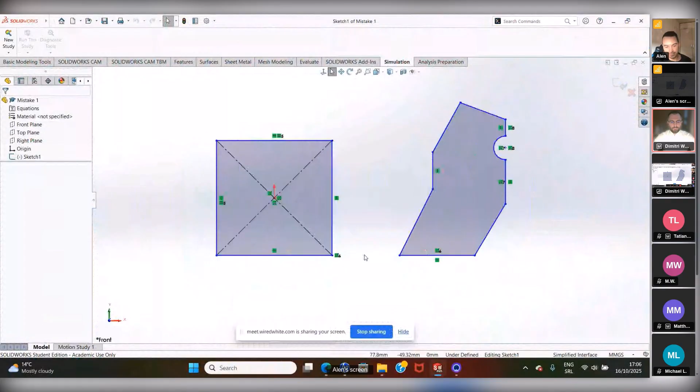So I'm gonna share with you 10 mistakes that beginners make. So this is more for the beginners. I'm gonna also maybe show you a few tricks at the end, if you're intermediate. Maybe it's gonna be interesting to you as well. I'm gonna start with the sketching things, because I think this is very foundational, and I know that a lot of beginners just skip these steps, not paying attention to the sketches, but then later, when they actually create 3D models, they have problems. When they have to redesign something or change some dimensions, then the model starts breaking.

So the first mistake that beginners do is when putting dimensions, they overuse dimensions instead of relations, right? So when you create a sketch, you have to define dimensions. And what a lot of beginners do, they just start putting all the dimensions right here. This is just a simple example. Then they put here, and okay, I already put it here. Let me just delete this. This was from before.

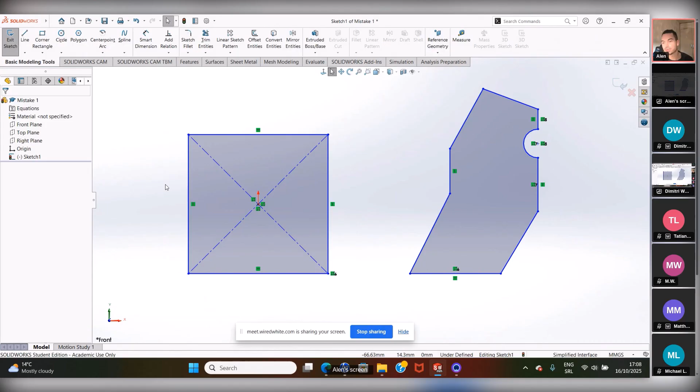Like this one, or for example, they're gonna put an angle here and here, but these two lines are parallel, right? So this is not very efficient. Or they're gonna put the height from this line to this point, but then also from this line to this point, although these 2 points are in the same horizontal line, right? So when you actually want to fully define a sketch, first you want to put relations. For example, if I know that this line here and this line here will be equal, I don't have to put 2 dimensions, right?

I can just click on this line, hold Control, click on this line, and here I have different relations like horizontal, vertical, collinear, parallel, perpendicular, equal, and so on. So I can just choose equal and click OK. And now I have this sign, as you can see, equal, right?

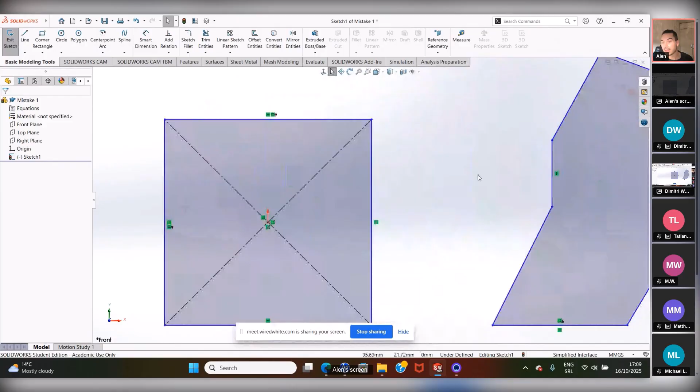Now what I can do, I don't have to put 2 dimensions. I can just put 1 dimension, like this. And now if I change this dimension to 50, automatically the other one will change as well, right? So this is just a very simple.

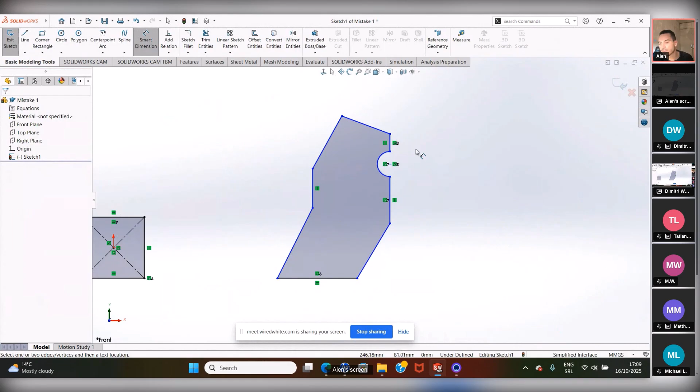Now this is a little bit more, not say complicated, but we have more lines here. As I said, for example, if we have, okay, I got off the sketch.

For example, if I have these 2 lines parallel, first what I want to do is define relations. So I'm going to go here with parallel, like this. And also I have a sign here, this is parallel. Or this point and this point here are on the same horizontal line.

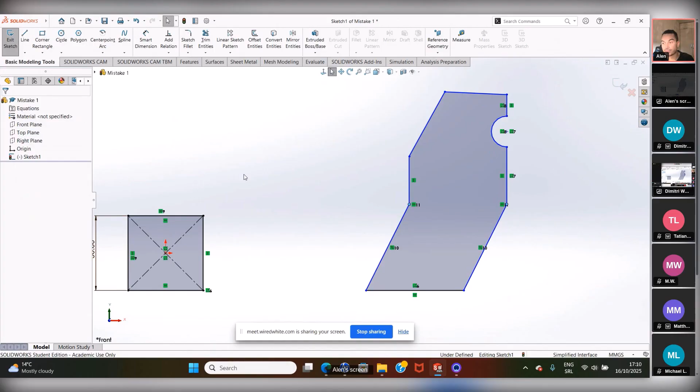So I'm going to click this point, having this point horizontal, right? Or, for example, this one here and this one here, they must be perpendicular, like this. This is just an example. Let me just drag this down, like this. And then, for example, this one here and this one here, they must be equal.

So the first thing I want to do, as you see now, is define all the relations. Because then if I'm going to change something later in the model, these relations will stay the same. This is the whole point, right?

And now I can start with dimensions. Now I can put dimensions on this line. I can put an angle here, like this. And now if I have an angle here, I don't have to define an angle on this one, because if I change the angle here, this one will automatically change since they are both parallel. Or if I define this height as well, I don't have to define this one here. If I define the length of this line, I don't have to define the length of this other line. And now I have fewer dimensions.

So let me just put it here. I have to define this angle. Let me see what I need more. This one here.

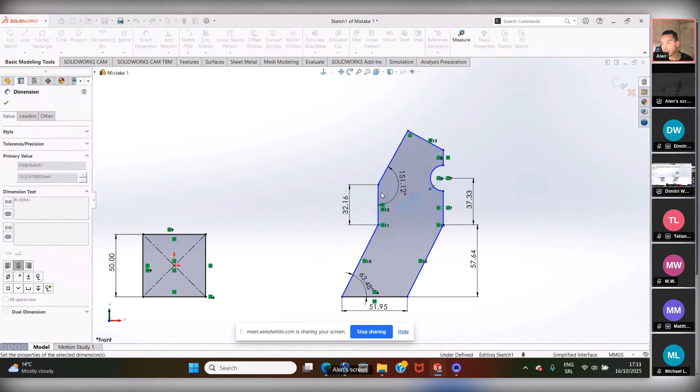A quick question, Alen. Yep. We have Patrick asking regarding the software, whether this is the latest one from SolidWorks or which version particularly are you using? This is 2025. Right, yeah, I think this is the latest one. I think 2026 is still not here. Mm-hmm, yeah.

So basically, once you have these relations, I don't know, maybe I can define even more relations. If I have, let me see if I can do this now. If I didn't put too many, I can also say this is horizontal as well. No, this doesn't work because we have an overdefined sketch now. But that's something you do at the very beginning.

You put all the relations, and now you can put all of the dimensions that you need here, right? So let me see what is actually left here. Maybe this angle, I'm not sure. No, it's not, although this is not needed. This one is also not.

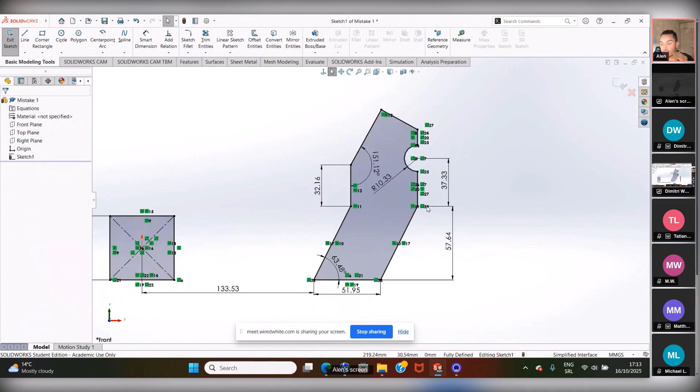It was not the origin, which is another mistake that I'm going to cover. So basically, the lesson here is: first define relations that you have between all sketch entities, and then define dimensions, okay? So that's mistake number 1.

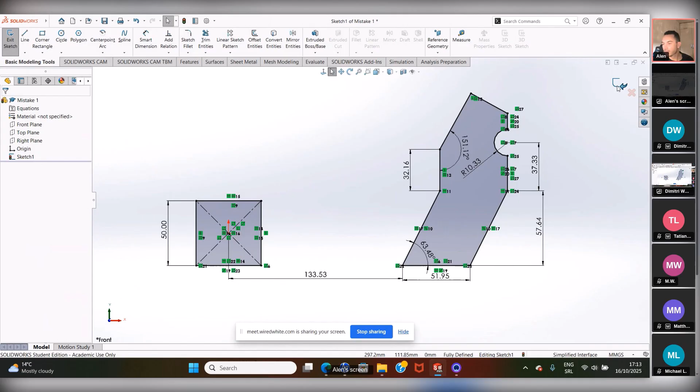I'm going to exit this. Let's go to mistake number 2.

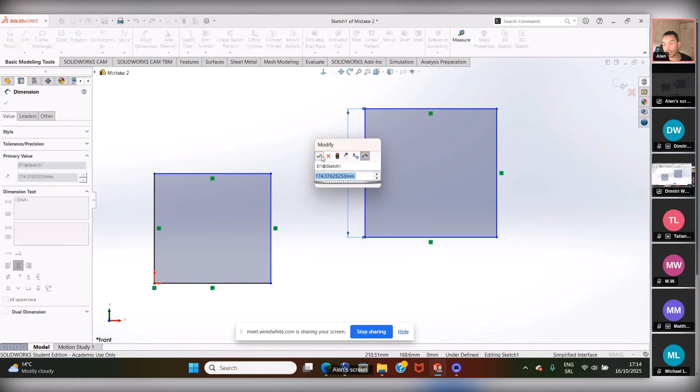This is ignoring the coordinate system, which is actually what I didn't pay attention to when I was showing you. Not only by ignoring the coordinate system, but also knowing where you have to put your coordinate system. Now, as you saw before, if I fully define this sketch, if I put all of the dimensions here, if I try to fully define this sketch, it's still not fully defined, right? Because it's not connected to the coordinate system here. So you want to connect this to the coordinate system one way or another.

The question is where you're going to put your coordinate system. You want to put a coordinate system at a point that's going to be the referent point, so that this point will always be there, and all other sketch entities will change relative to this point. For example, this one right here is in this vertex, the coordinate system, but for this one...

I have to define dimension here. I have to go here, and I have to define this dimension as well. Now this sketch is fully defined. So it's not about only putting a coordinate system, but also making sure you know where to put a coordinate system based on what dimensions will change later.

You want to have a reference point, and that also depends on the manufacturing process—how this part will be manufactured later. So this is designing with intent, compared to designing without intent, where you just put a coordinate system wherever you want. This is also a mistake that a lot of students, beginners, make. They don't pay attention to the coordinate system, so pay attention to it and to where you put it.

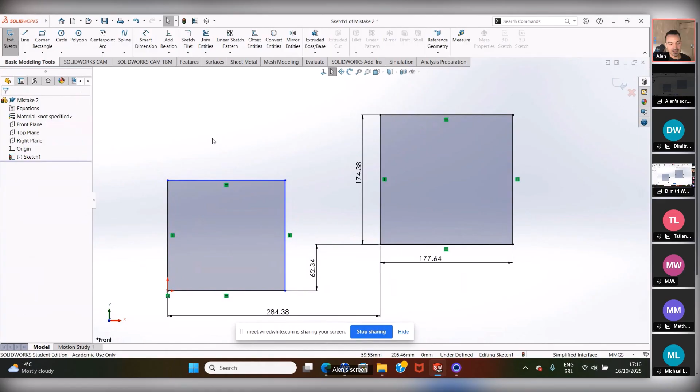So this is mistake number 2. We started with these beginner mistakes. Then we have number 3, which is also related to sketches.

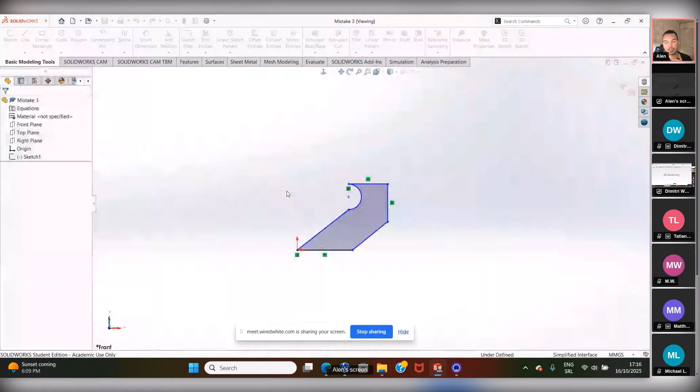This is not fully defining your sketch. In SolidWorks, if you work with it, you know there are 3 possible outcomes when it comes to defining sketches: underdefined sketch, as you can see here down below, fully defined sketch, and overdefined sketch.

When you have an underdefined sketch, you're going to have blue lines. This line here is black because it's coincident with the coordinate system, but I can still control the length—this point here is blue, although the line is black. So it's not fully defined.

So for example, if I want to fully define the sketch, as I mentioned in the first mistake, I first want to make sure that I add all the relations that I want. Let me put a relation—I'm going to put a horizontal here. That's okay.

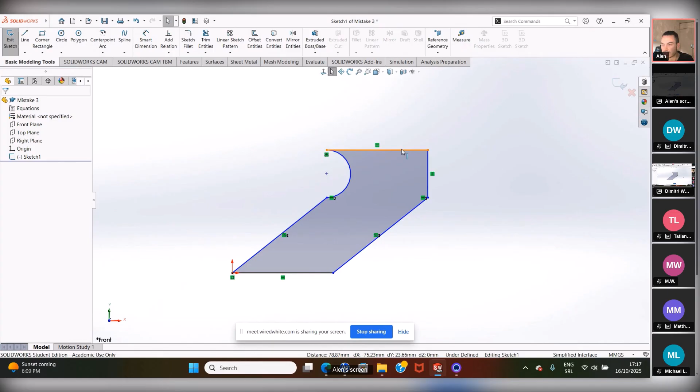Let me see what else I can do, let me see if this is fixed. Okay, as you can see, I can move this. So what I want to do now is make sure that this point and this point here are vertical, like this—they're on the vertical line. So now I can move one relative to another. I have this, and now pretty much I've put all of the relations, and now I want to put dimensions.

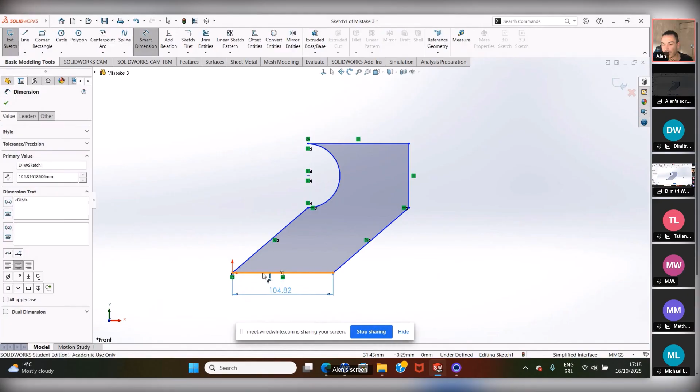I'm going to go with random dimensions here, so I'll go with the angle. Just want to show you one thing. Okay, we have this. Oh yeah, we defined that already, we don't need this one, and we defined this one. Let me see what we got left—oh yeah, we got this one left.

Yeah, this is it. So now, as you can see, our sketch is black, that means it's fully defined. As you can see here, fully defined sketch. This is what you always want to do with a sketch—make sure it's fully defined, because if it's not, later when you use this sketch to create 3D models, your sketch can break, especially when you have to edit something down the line.

But now, for example, you can put this dimension here, and what's going to happen? You're going to get this warning: adding this dimension would make the sketch over-defined or unable to solve. Now SolidWorks gives you two options—you can make this dimension driven, or you can leave this dimension driving.

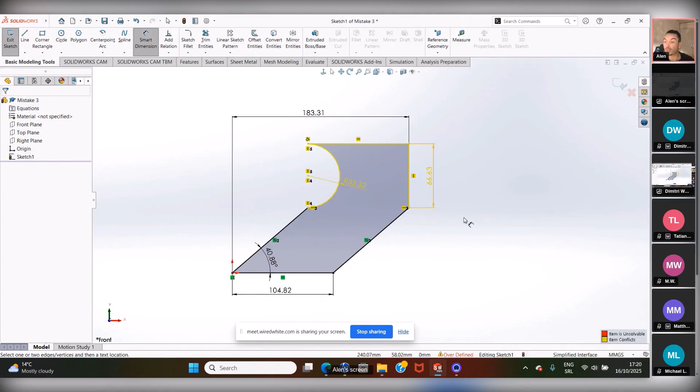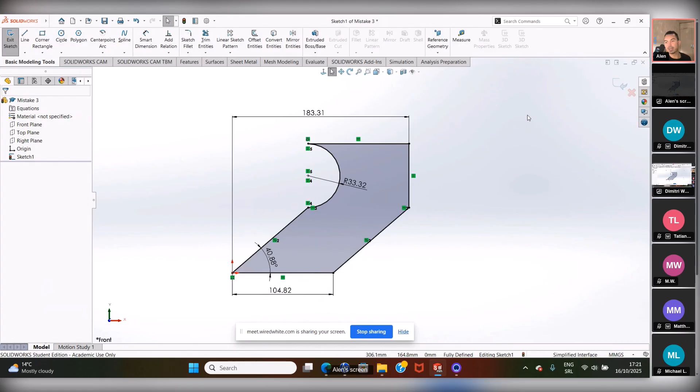If you add another dimension once you have a fully defined sketch, make sure that dimension is driven, right? Let's say it's a supporting dimension, not the main one. So this is all when it comes to fully defining the sketch. You want to make sure it's fully defined, because I know for myself, when I started learning SolidWorks, I would just make a sketch with a lot of blue lines and start creating 3D models. But later, when you change some feature in the 3D design, your sketch starts breaking. So yeah, this is mistake number 3.

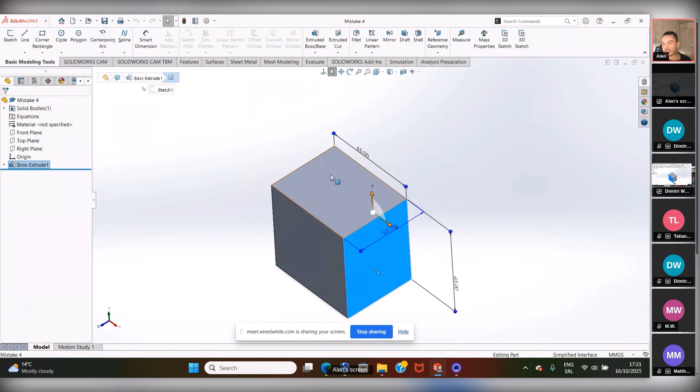Let's exit this. Now let's go to something a little more advanced for beginners - not using reference geometry. So what is reference geometry? We have a 3D model, and what a lot of beginners do, if they want to create some sketch on this 3D model, is start creating sketches face after face. The model becomes very complicated, and they use more features than they have to - too many of them. What you can do instead is use reference geometry: plane, axis, and point.

So let me show you. For example, I'm going to choose a point - there are many options for how you can insert this point, but I'm going to insert it on this edge, at a distance of 10 millimeters. Then I'm going to create an axis, choosing 2 points - the axis will go through 2 points or vertices. So I'm going to choose this point and this point. Let's click OK. Now I'm going to create a new plane.

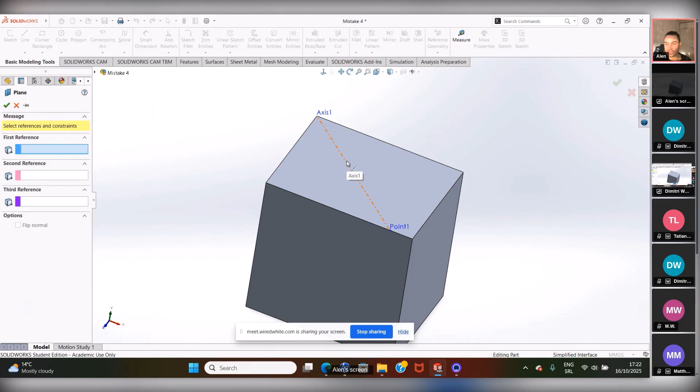I'm going to use this axis - I want my plane to go through this axis, like this. And I'm going to put this at an angle, 60 degrees. Let's click OK. Now, why would I create this?

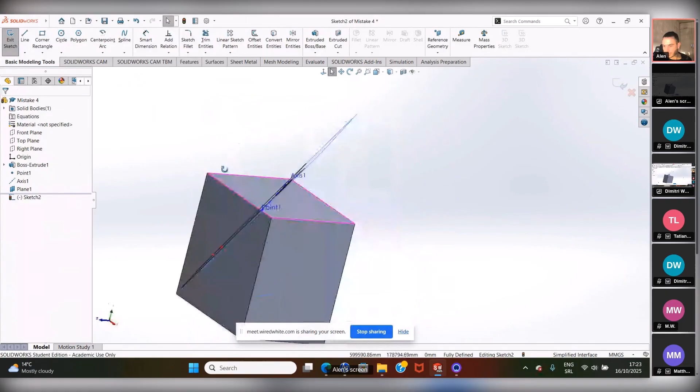For example, if I want to create a sketch, I'll show you one example. I can create a sketch here. I'm going to go with a circle, like this. Let's click OK. I'm just going to fully define the sketch, because the dimensions aren't important now. And now I'm going to go to Features, Extrude Boss Base.

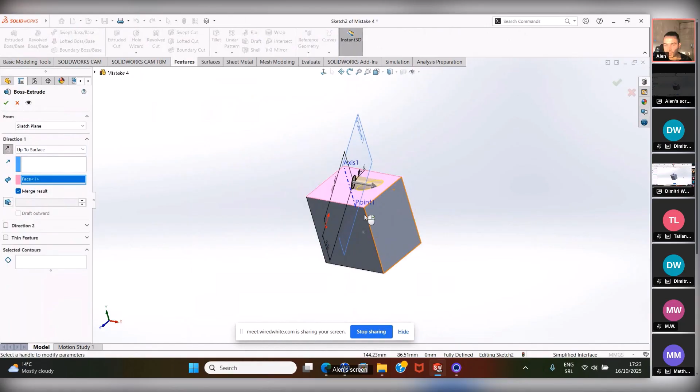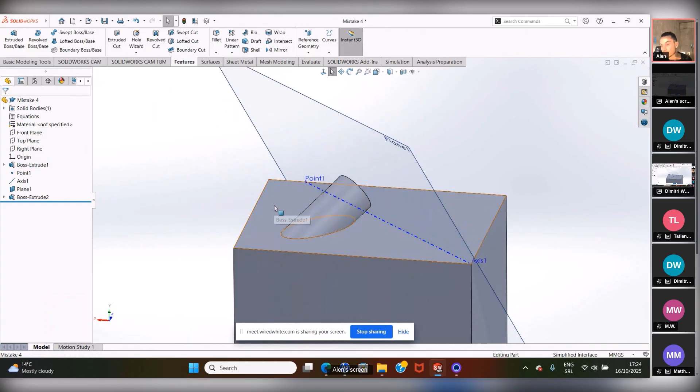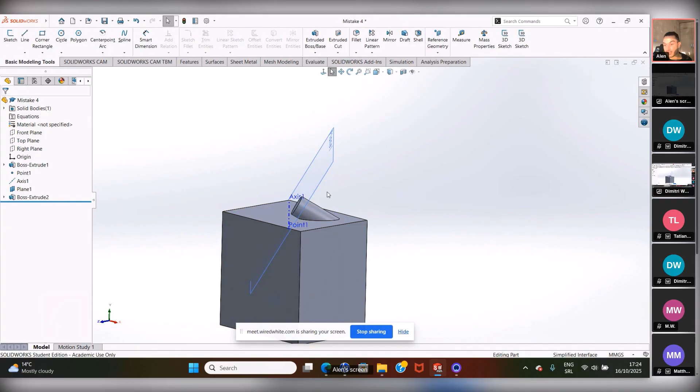I'm going to go up to the surface, and choose this surface, and click OK. Now, if I hadn't created this plane, creating this feature on this 3D model would be very difficult - if you were only creating this feature by making a sketch on this face. But when you know how to use these reference geometry tools - plane, axis, and point - you can much more easily create features and save a lot of time by saving features. I don't have to use as many features to create this. But if I wanted to create this feature by making a sketch on this face, that would take more features to make it happen.

So yeah, you want to start using reference geometry. A lot of beginners - and I also speak for myself, when I started, I didn't use this reference geometry, I was just creating sketches on these faces. So yeah, this is mistake number 4.

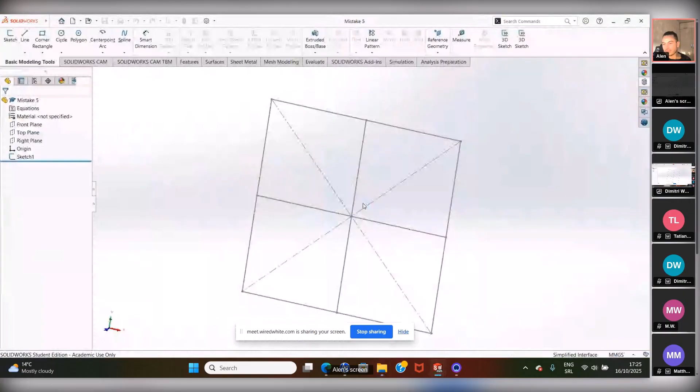Then we have mistake number 5. This is also very interesting, and a lot of people don't use it. Maybe for beginners this isn't as important, but it's very useful - this is using one sketch for multiple features. So instead of creating a new sketch for each feature, you can create one sketch and then use that sketch for multiple features. Let me show you.

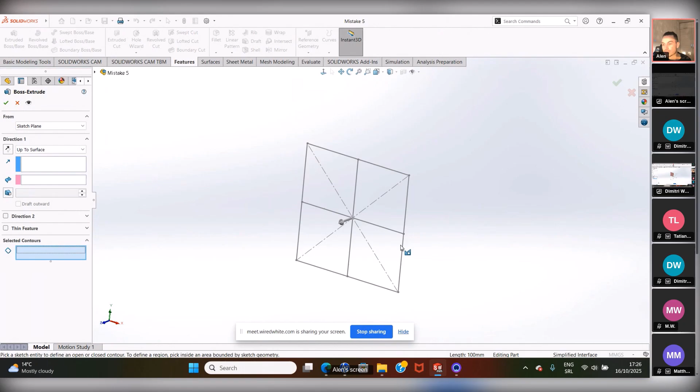So we have one sketch, as you can see. I can go to Extrude Boss Base, and I'm going to select this sketch. Now what I'm going to do is go to Selected Contours. I'm going to clear this, and I can choose which contour I want to extrude. I'm going to extrude this one, choose Blind, and go with 50, like this. Let's click OK.

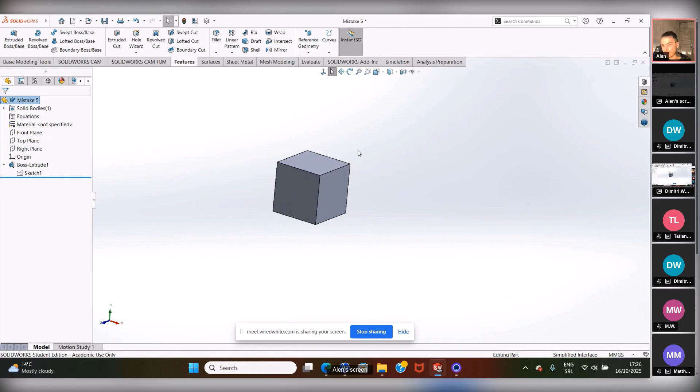Now, as you can see, we have one feature and one sketch. But if I want to extrude another contour, I don't have to create another sketch - I can just use this same sketch. I can click on this sketch and again go to Extrude Boss Base.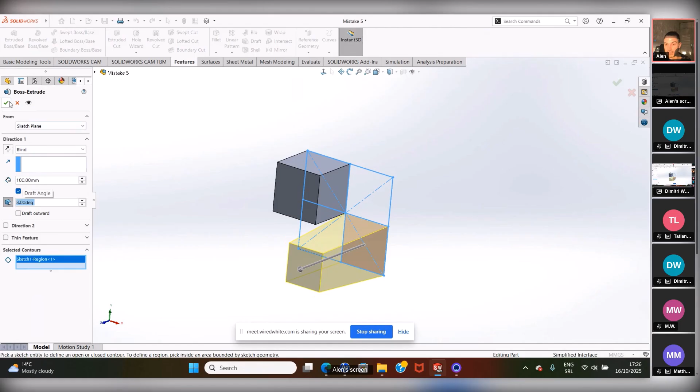Like this, right? And now I can go here to selected contours again, and I can say, okay, let me now extrude this one here, and let's go here with 100. And I want to create some angle, let's say 3 degrees, like this. Let's click OK. Now we have 2 different features by using the same sketch. As you can see, sketch 1, sketch 1.

I can go further. I can again use this sketch. And now I can create a third feature that's going to be completely different. So I can go here to the selected contours again. I can, for example, go with this one. Okay, let me select this one, I can go to opposite direction. For example, like this. I can click OK, right? And now we have 3 features created by the same sketch.

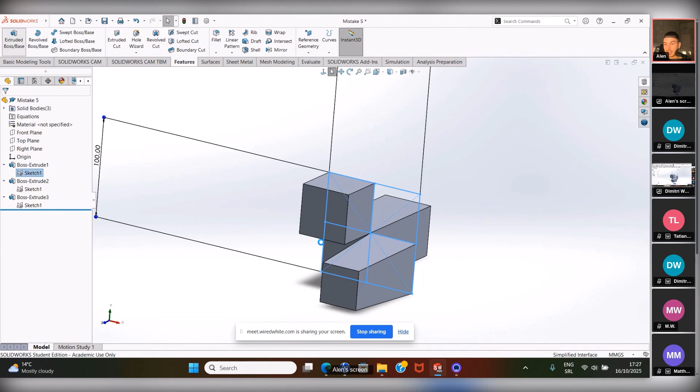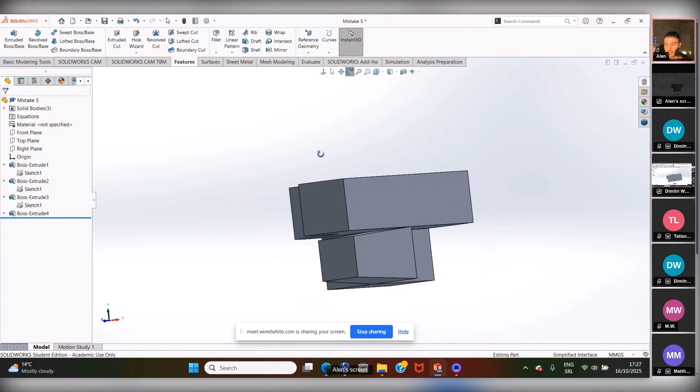And I can go now even the 4th one, right? Click Sketch, Extrude Boss Base. Select Contours. This one here. And I can also go to direction 2. Like this, I can click OK. Right? So now I have 4 different features, as you can see, but I use the same sketch. Instead of creating new sketch for each feature.

So yeah, when you see opportunity that you can use the same sketch by multiple features, then choose that and try to do this way, right? Because this way it's gonna be much simpler. You're gonna save more time for yourself, and you're gonna save also more memory, and if you have to change something, it will be much, much simpler for you. So yeah, this is mistake number 5, not using sketch by multiple features.

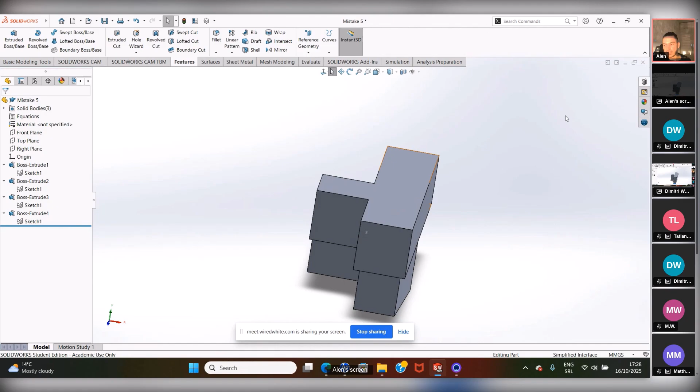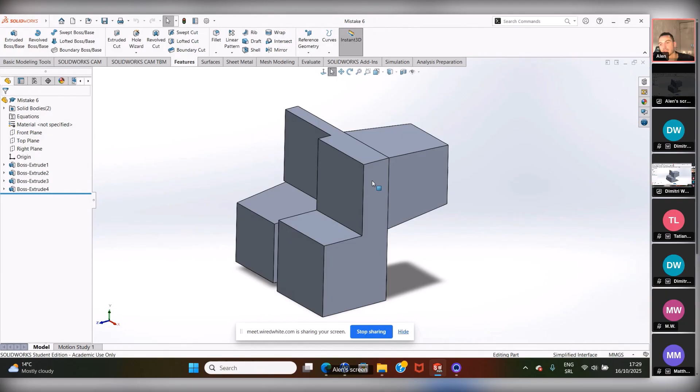Let's go to the number 6. Okay, this is also, let's say, a little bit for the beginners, and this is ignoring material and mass properties. And when I think about mass properties, I mean the coordinate system, I mean the unit system. There's actually one situation where European engineers worked with American engineers, and they were using different unit systems. One worked with inches, the other with millimeters, and didn't pay attention to that, and there was a complete mistake in the product because they didn't agree on the unit system.

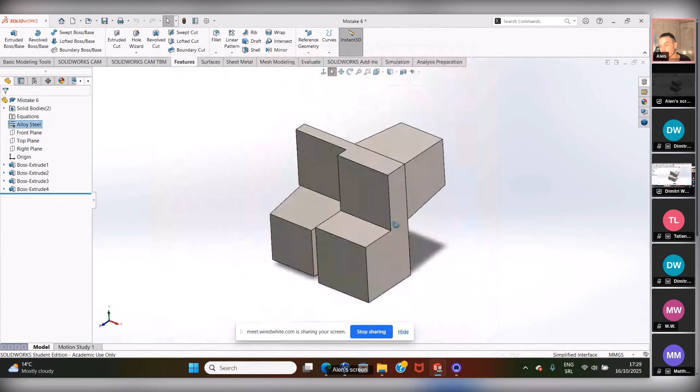So when you actually create something, the first thing you want to define is your unit system, right? You just come here and then you choose whether you're going to work with inches, millimeters, and so on. So that's the first thing. The second thing, you want to define your material. So you come here, edit material, and then you can just pick the material that you want. For example, alloy steel, apply, and that's it, right? Now the model changed the color, and we see here we have alloy steel.

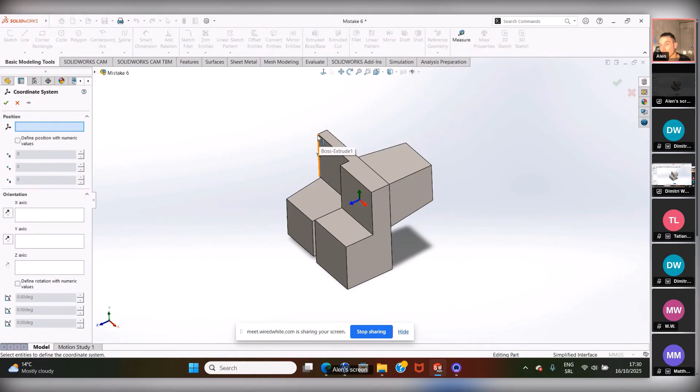And then also, for example, if you have to calculate the center of the mass, I can go here and create a new coordinate system. And you can put this coordinate system wherever you want, depending on what you have to calculate. If I have to calculate center of the mass relative to this point, I can just put it here and click OK. And now if I go here to the mass properties, I have here mass, right? And this mass would be different if I didn't apply material.

I'm showing this because maybe you think, okay, why is this important? But this is also important if you want to take SolidWorks certification exams, CSWA and CSWP. In each task, you're going to have to calculate mass or center of the mass. And you're going to have to change materials. You're going to have to change the coordinate systems. And if you forget to change the material, the mass will be incorrect, right?

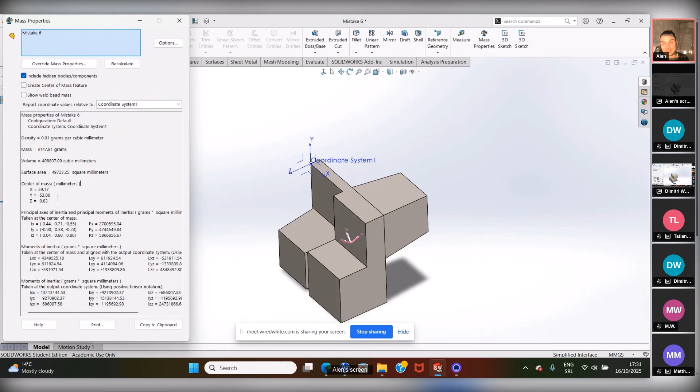Also, as you can see here, center of the mass. But this center of the mass is not relative to this coordinate system, right? It's relative to the origin coordinate system. If you want to calculate center of the mass relative to this coordinate system, we have to go here and choose coordinate system 1. And now we have different results. So this is especially important if you really want to pass SolidWorks certification exams. You have to really pay attention to the mass, coordinate system, and center of the mass. So yeah, this is mistake number 6.

Let's go on. And now we have mistake number 7, which is not using patterns and mirrors.

So, patterns and mirrors. This is something you can use where you have the same instances and you don't want to waste time creating the same instance or the same feature over and over again. Then you can use mirror. You can use mirror and patterns in sketching, and you can also use them with features.

So if you go here, you have linear sketch pattern and circular sketch pattern. With linear, you choose the axis, then you choose the entities like this. You choose the number of entities you want here, let's go with 2, and then you choose the distance between the 2 entities, for example, 50. Let's click OK.

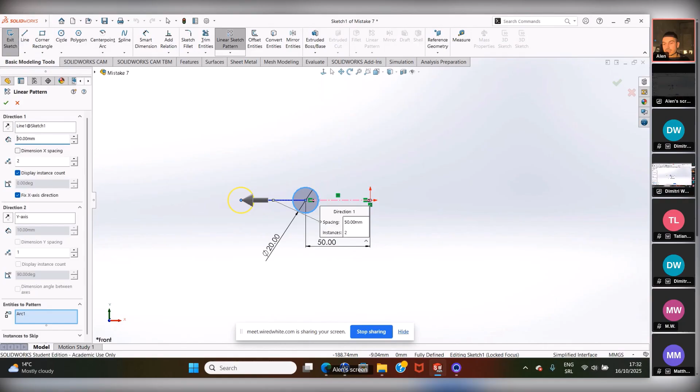And now we have another instance of this, 2 of them, as you can see. We can change this to 3, 4, 5. Now, before you continue, you want to make sure this is fully defined. As you can see, I can move this, so I want to put a smart dimension here. I defined this 50 before. So now we have a fully defined sketch with 2 instances.

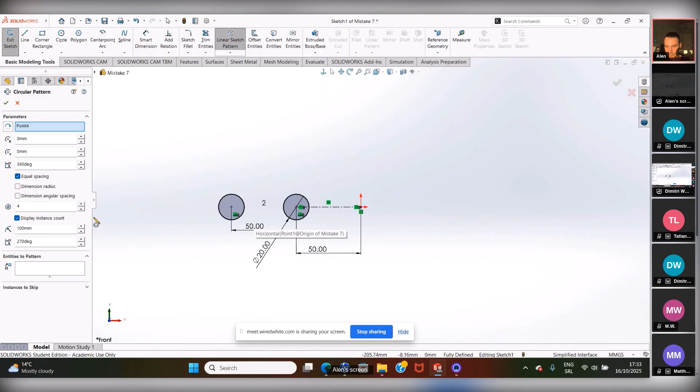The same thing if you want to use circular sketch pattern. You have to define the axis of rotation and the entities to pattern, this one, like this. And for instances, let's go with 6. Let's click OK. So we have the same instances at some distance. We can use this linear or circular sketch pattern.

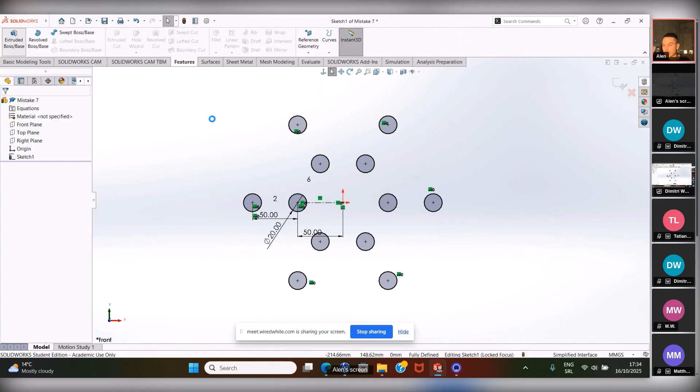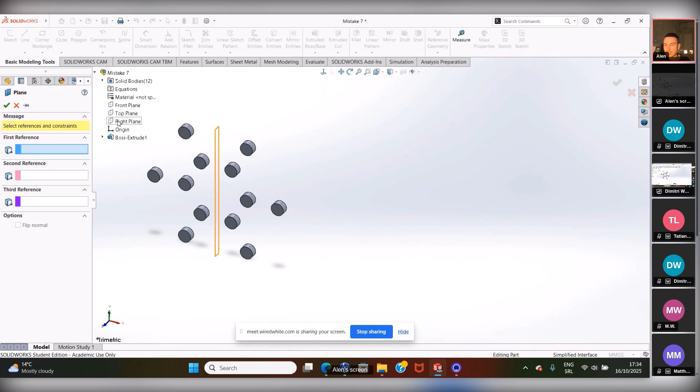And now, for example, we can also go to the features. We can extrude this. Let's just go like this. You can also mirror this, and you can also create linear and circular patterns here, as you can see. But what we're going to do here is mirror this. So the first thing I'm going to do is create a new plane. Let's go like this, 150, that's okay.

I'm going to go to the features and go with mirror. I'm going to choose this plane. And here it's very important, you have 3 options: features to mirror, faces to mirror, bodies to mirror. Now, what is this? These are bodies. How do I know this? Because they are not connected, and here I see solid bodies. I have 12 bodies.

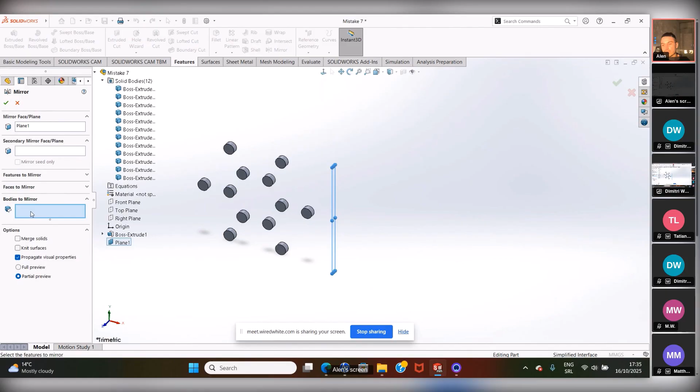If I choose features to mirror here, it will not work. So what you want to do is go to the bodies and select these 12 if you want to mirror them, and click OK. So this is another tool that can save you a lot of time.

A lot of beginners don't use these things, which I understand, maybe it's a little bit more advanced when you start learning SolidWorks. But it's very simple in general, and it can save you a lot of time. It can also save you a lot of memory, and it's easier to edit if you have to edit something later. So that's the mistake of not using patterns.

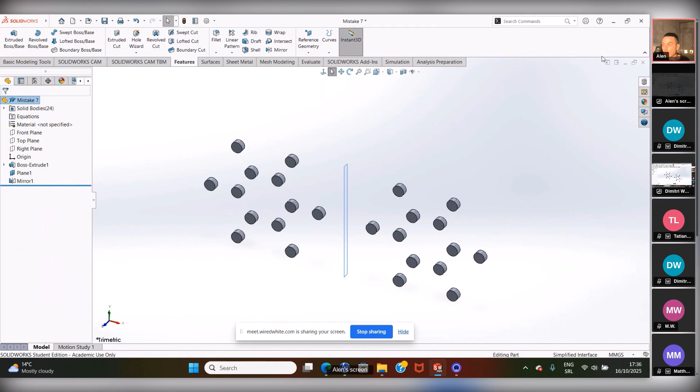Mistake number 8, not using equations. Maybe this is a little bit more advanced, but if you're going to take the SolidWorks certification exams, you have to know how to use equations. Let me give you a simple example. Let's say this line here needs some relation relative to this line here, and this relation is not simple, like twice the length of this line. It's a little more complicated.

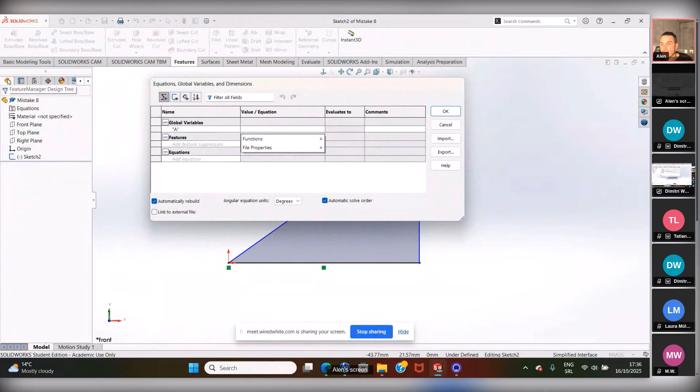What's great about SolidWorks is you can define equations. If you go to Tools, you have Equations here. You can define global variables and then define equations. For example, my global variable A will be 100 millimeters. Then I will have a global variable B that will be A divided by 2 plus 5. This is my equation now. So B will be A divided by 2 plus 5, and that relation will always hold unless you change it.

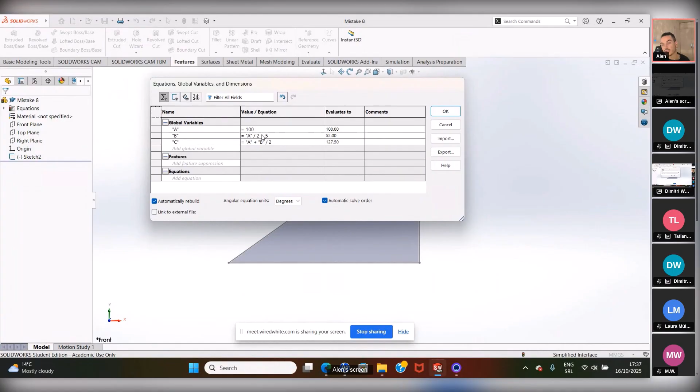And then I'm going to have the global variable C, which is going to be A plus, for example, B, divided by 2. I can use two global variables. Now I have 3 global variables and 2 equations. I can click OK. And now, for example, if I want to add dimensions here with specific relations between these 2 dimensions, I can go to Smart Dimension.

I can select this line. And instead of just putting some number here, I can type equals, and here we have global variables. Now I can choose the global variable that I want. Let's go with A, like this. And as you can see, we have a sign here. This is a global variable.

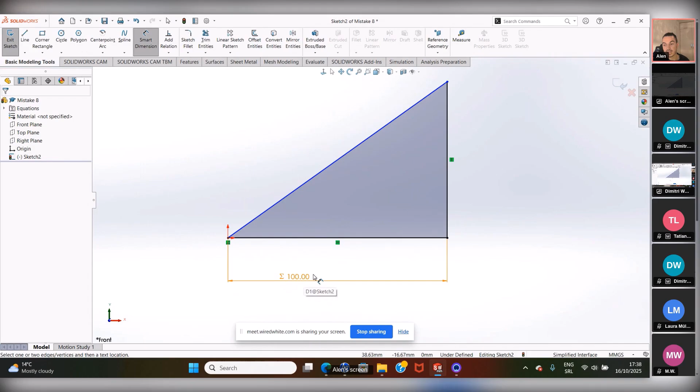Also, I can go here and put a global variable on this one. So I'm going to type equals and also choose a global variable. I'm going to go with B. Let's click OK. And now, for example, if I change one global variable, this one will change as well automatically. Let me just show you one thing.

So now, as you can see, we have 3 global variables. You can see them here. So we can go here now, Manage Equations, and I can say, okay, I want A to be 50. And now you can see how this changed. This one is just smaller.

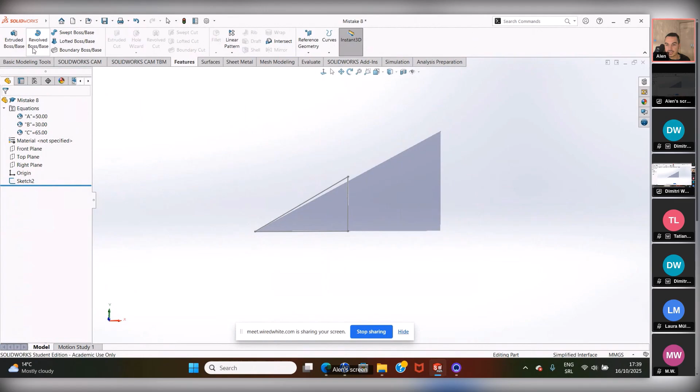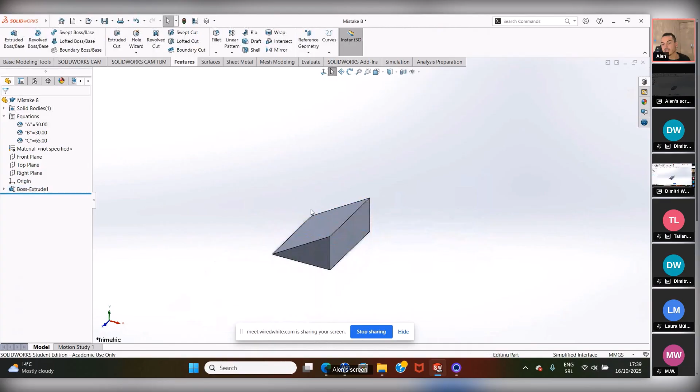And also what I can do, I can go to Features and extrude this. And instead of just a random number, I can also put a global variable here. Equals, global variable, I'm going to go with C. Like this. Let's click OK. And now if I want to change this, I can just go to Equations, Manage Equations, and I can change the equations here, or I can just change this number and the relations will stay the same.

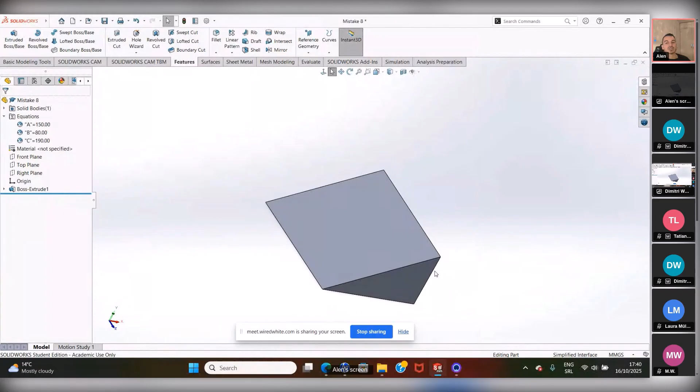So this is very useful when you know that you have specific relations between sketch entities, different lines, circles, and so on, or even features. As you can see, the extrude here, the depth of the extrusion. When they have a specific relation, and it's not a simple relation like 2 times longer, you can make any equation you want. Then you want to use these equations, because if you have to change one thing, the relations will stay the same.

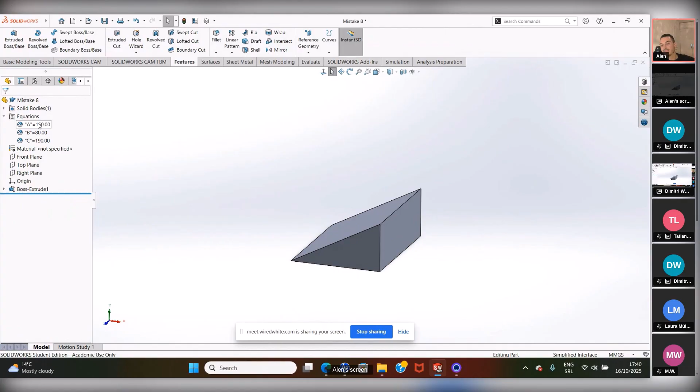So basically these can also save you a lot of time, and a lot of beginners don't use this, maybe because it seems too advanced, but it's not very complicated. You just have to start working with it. And all of the equations that you have, you can see here. Very simple. So this is mistake number 8, not using equations. Mistake number 9.

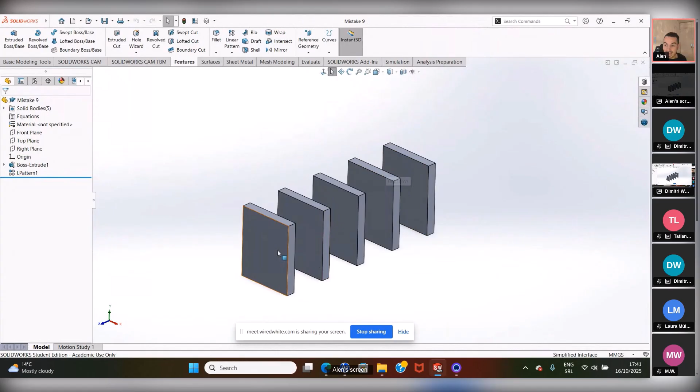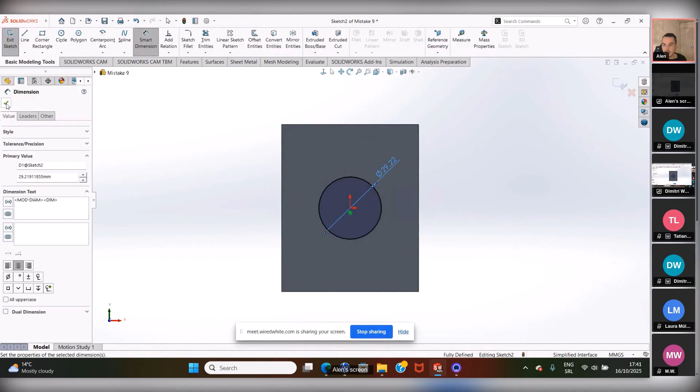Now this one is maybe more advanced, and this is not a mistake. Let's say this is a good tip or trick, and it's not even a specific tool. For example, we have these 5 solid bodies. Let's create a sketch here. I'm going to just put a circle. And now I want to use this sketch to create a hole on this body, on this one, and this one here.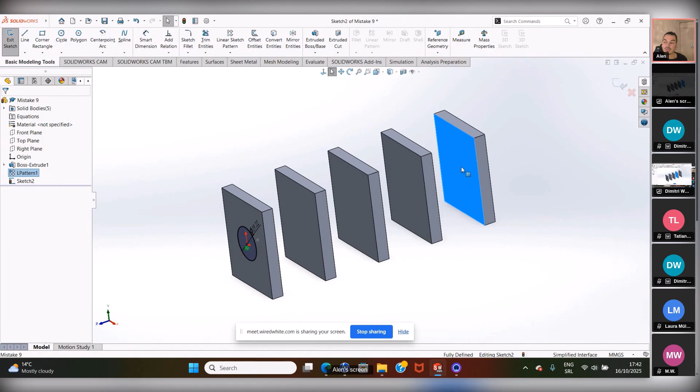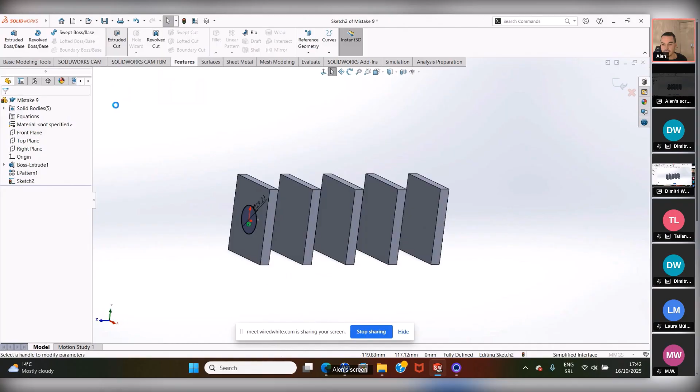What most beginners would do is start creating a sketch here, here, and here. So they would create 3 sketches and use 3 extrusions. But you can do this by using one extrusion and one sketch. This is not a specific tool, it's one feature in the tool. For example, I can go to Features, Extruded Cut. As you can see, if I just leave Through All, we're going to have a hole through all. I can click OK, and now the hole is going through all, but I don't want that.

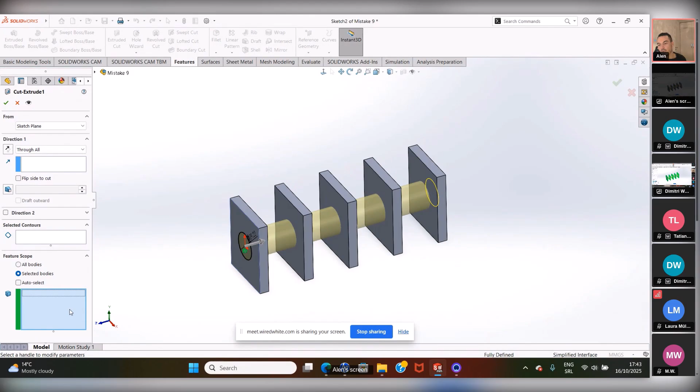I just want the hole on this one and this one without creating additional sketches. So let me show you. Just go to the Extruded Cut, and here we have Selected Bodies, and this is called Feature Scope. It's just an option under the tool. I can clear this and say, okay, create this hole only on this one and this one. Let's click OK. And now, as you can see, we have a hole only on these three, not on this one or this one. If you want to change it, you can just go here again.

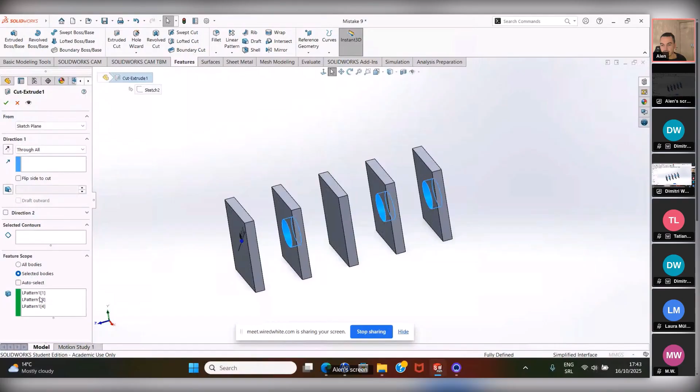You can clear this, and you can choose, okay, I'm going to choose this one and this one. Let's click OK, right? So we just used one sketch and one extrude. And this saves you a lot of time. It makes everything simple. Your feature manager design tree is much simpler because you don't have a lot of features and sketches. This is something that most other people don't use, but it's very, very useful.

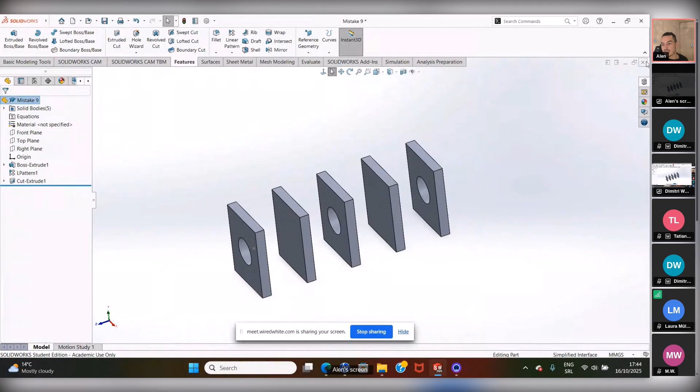And a lot of people don't know about this because it's not a tool, right? It's just an option under the feature. So this is mistake number 9. And I'm going to show you the last mistake, and this is related to the assembly. This is mistake number 10, which is not knowing how to properly insert parts into an assembly. Now, there are actually 3 ways you can do it. I'm going to show you 2 ways to insert a part in the assembly the right way.

Now, what a lot of beginners do when they create an assembly, they just take a part and throw it in, right? You go here to insert, of course, and open this. They take the part and just put it in a random place. They just click. The problem with this is you don't know where in this space your part actually is. And if you try to move this part, you can't.

You can't because if you go to the feature manager design tree, you can see this letter F. This means it is fixed. That's why you can't move it. Now, we can right click and make it float. As you can see, we don't have an F. Now we can move this part. So we want to position this part right in the coordinate system, so we can actually define where in the space this part is.

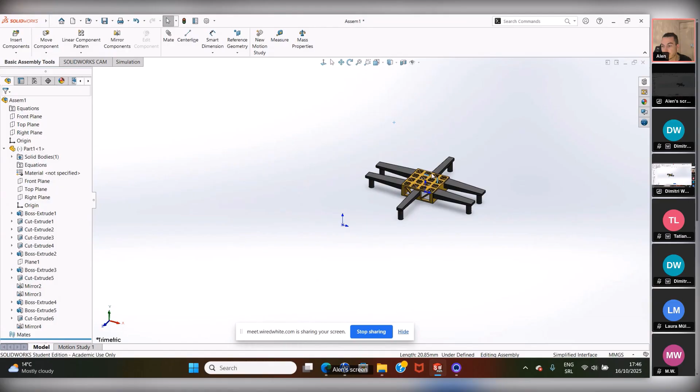So the first thing you want to do is view your coordinate system. Let me just see where it is. Why don't I see it? Actually, that's the wrong way. You want to view your origin, not the coordinate system. Once you have the origin, this is the origin of the assembly, and this is the origin of part 1. You want to make sure they're coincident. So just go to the mate, select this point and this point, and automatically the part will come right to the coordinate system.

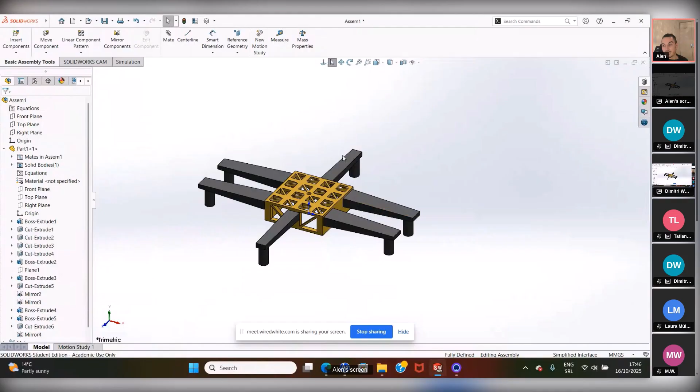So this is one way, but it takes more time, so it's not the most efficient way. The most efficient way is like this. Let me show you. I'm going to delete this. Okay, so once you open the assembly, you want to go here to view origin, like this, so we see the origin of the assembly. Then you go to insert components and take part 1.

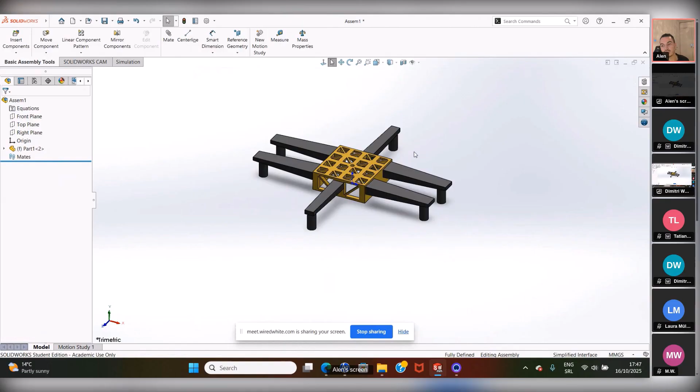And now, if I go with my mouse over the origin, part 1 will automatically jump right into the origin. As you can see, boom, right into the origin. I just leave it here, and that's it. This is the fastest way to insert your first part. And if you want to insert the second one, just go here, part 2. This is the second part. And now you define the relation between part 1 and part 2.

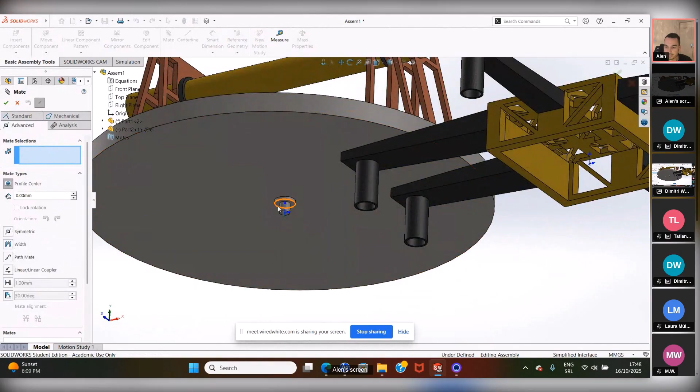I can go to the mates, then to the advanced mates. I'm going to use Profile Center. This is also one of the advanced tools, and it can save you a lot of time. Profile Center puts it right in the center, like this. Now we have this right in the center, and we can only rotate it. We can also insert part 3, and as you can see, this now goes very, very quickly.

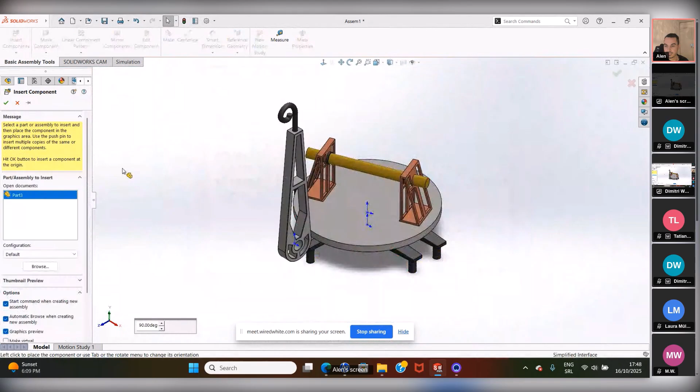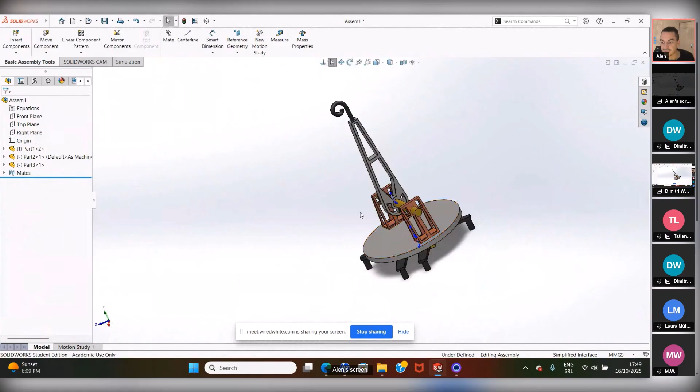For this one, we can go to the mates and put it right here, like this. We can also define the distance, for example, between this one and this one, let's say 100, and click OK. Now we can move it like this and rotate it, but we can also fix it if you want. So basically, this is the fastest way to insert your part in the assembly without using any mates.

So these are the 10 mistakes, or 10 efficient ways to design in SolidWorks faster and more efficiently. So when you later have to edit something, it's going to be easier for you, and the model and sketches won't break.

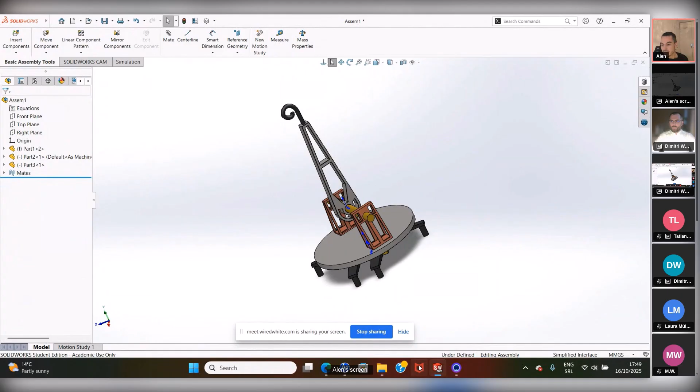So yeah, this is it. Perfect. From my side, thanks a lot. Thanks a lot, Alen. It was a very, very insightful webinar, and these 10 mistakes that you have shared, and especially the solutions to them and how to avoid them. I'm just gonna jump into the chat and see if we have some questions now.

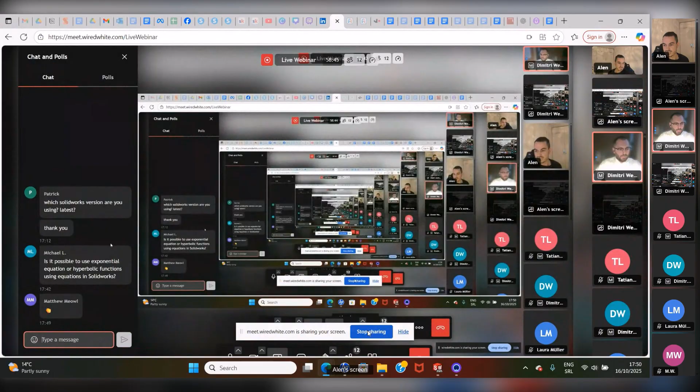I see one question regarding, I think it was mistake number 8, regarding the equations. We have Michael asking about exponential or hyperbolic functions, if it is possible to program them using equation functions in SolidWorks. So it's, I suppose, a bit mathematically more complex equations. Yeah, you can use exponential equations, but it also depends on which version of SolidWorks you have, right? Because not all functions are available in the student version and in the full software.

Mm-hmm. But basically, it is technically possible using SolidWorks to implement complex equations as well. Yeah, you can go more complex than what I showed. I just chose it as an example for the beginners. Okay, I see. Perfect.